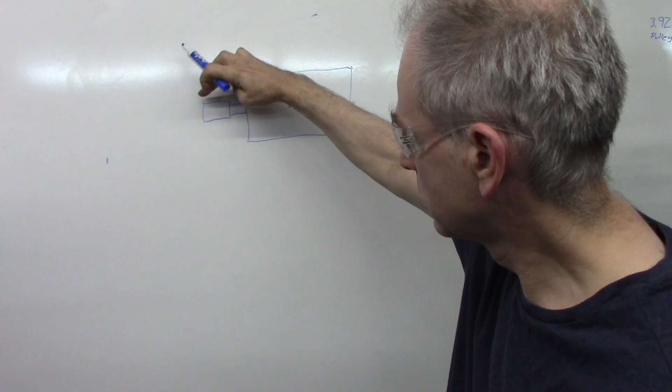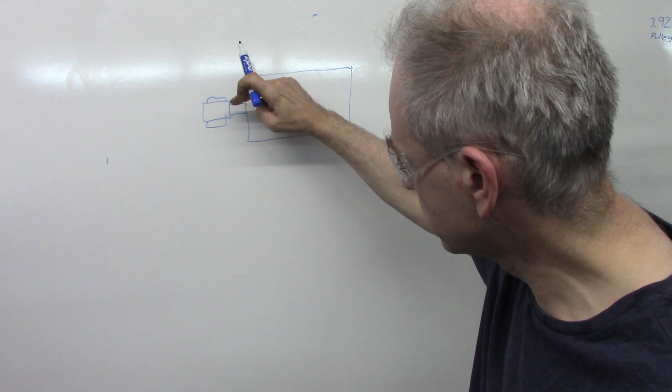Let me draw the motor, okay? Over here we'll show you the shaft, and on the shaft is the pinion gear, okay, and we'll draw some teeth on there. This is very cartoony, my apologies. And that's the gear I'm concerned about, to mesh with another gear, okay?

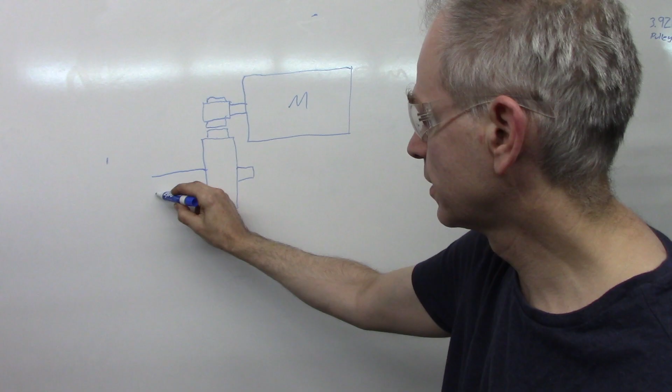And this would be the bull gear inside the transmission, all right? It's a little bit bigger, inside the transmission of the drill press. And there's bearings, and there's another transmission with other gears over here. So this here is the area I was concerned about to set the lash or the mesh, basically.

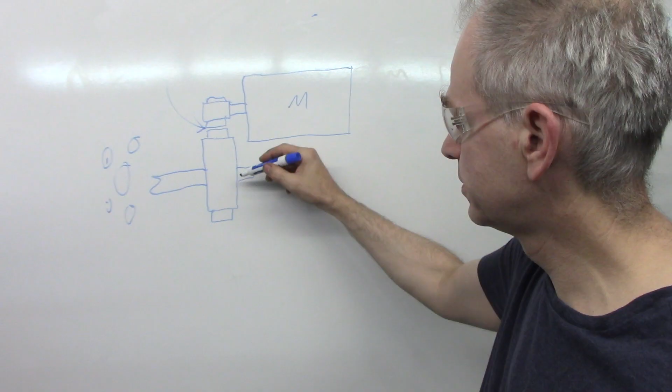How tight this motor shaft is to this shaft. And there's an alignment situation there.

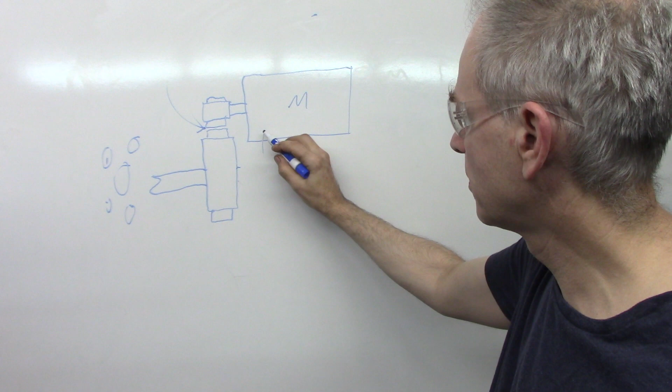So what the motor has is it's got mounting bolts, of course, 4 mounting bolts, mounting screws, and what they're attached to is like these 1 inch or 1 1/8 threaded jack screws, okay? So you can adjust the height of the motor and the pitch and the yaw of the motor to some small extent.

And here is, let's call it, the plate on the drill press where this is attached to, and these are threaded. And there's jam nuts on here and whatever. So these 4 jack bolts, I'm kind of just showing a side view, allow the motor to be going up and down and pitch it a little bit up and a little bit down. Not a lot, but maybe 10-20 thousandths.

So that all controls here how this pinion gear meshes with the bull gear that's inside the transmission of the drill press, headstock, or whatever you want to call it. So not knowing the gear lash, the mesh, and I got manuals I downloaded, there's nothing about it.

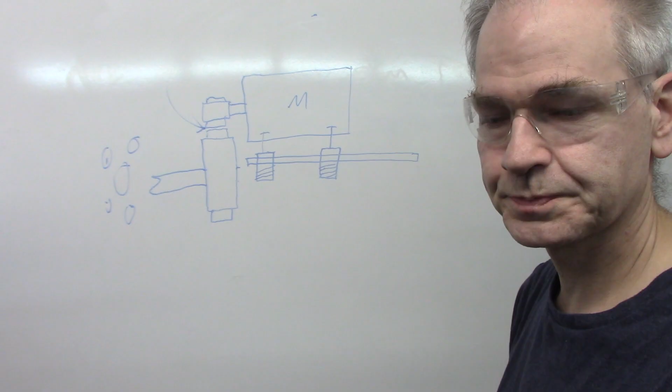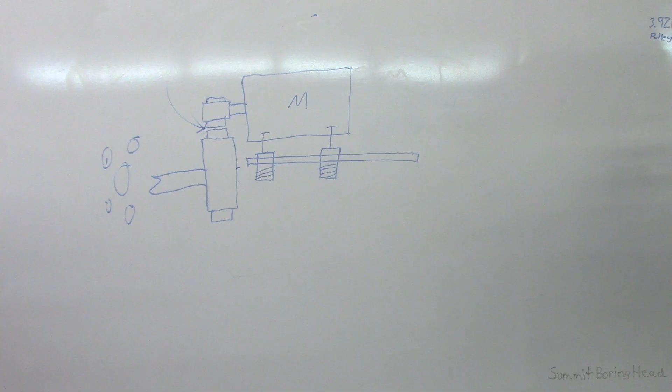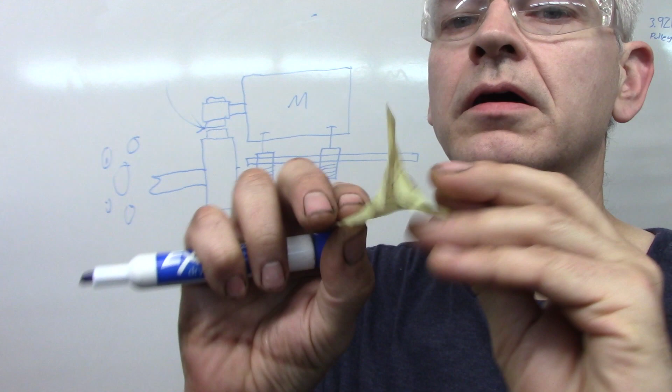So what I did was I used a piece of paper, actually. Let me steal it. Basically, I used a Post-it note folded in half, okay? And this is my contact pattern of the gears. And all I did is, it's just folded in half to give me the thickness. So the paper is 4 thou. Folded in half is 8 thousandths of an inch.

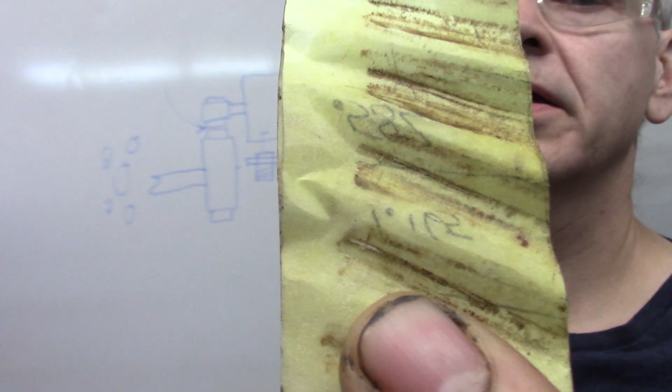And, you know, gave me a pretty good even contact pattern. Oops. Kind of see, there you go. The light hits it right. So that's what I was kind of working with, right inside here.

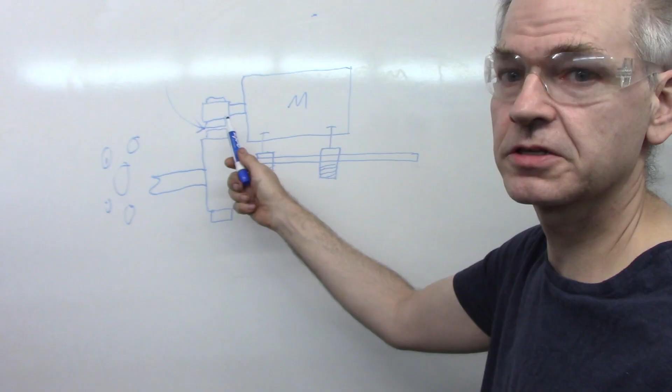So what I did is I put the paper in between the two gears that I was trying to get a mesh distance, but it also had to be parallel, right? It couldn't be wonky. So to get that parallel, what I did is I dropped, I loosened, I slackened off, whatever you want to say, these adjuster jacks, these adjuster screws.

And what I did is, so then the gears are meshing with the paper in between. So pretend my marker is the motor. The shaft of the motor and the gear was solely resting on the gears touching together with the Post-it note paper of 8 thousandths gap.

So then I used the machine level, okay? So let me draw a level over here. So I established that my base plate of the motor and the table of the machine was level, right?

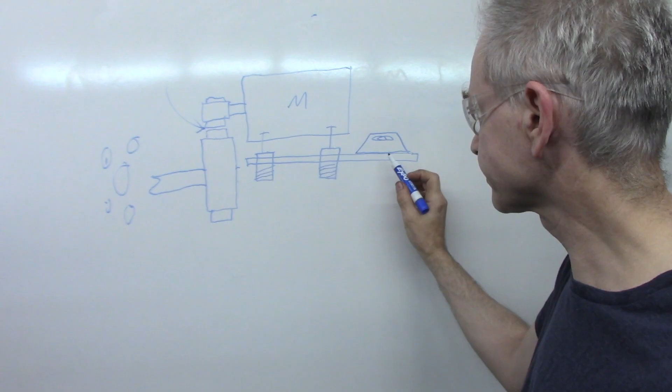With very precision, I use a Starrett 98 level. And this motor, it's a nice motor. It's a totally enclosed fan cooled motor with an extruded aluminum body with cooling fins. So it's got a nice flat top, as opposed to cast.

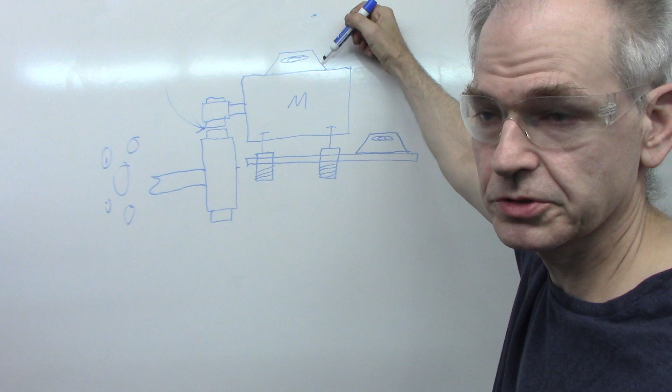It's got a level here, my cartoon levels, and there's the bubble. So I used that level after the machine was leveled, to set the parallel plane of the motor.

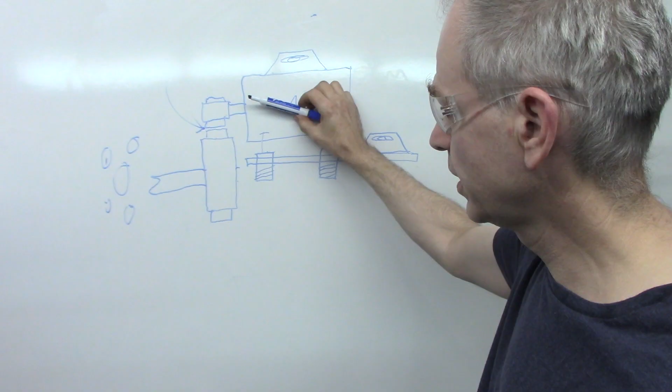So again, I loosened the bolts, loosened the height adjusters, and the motor was just resting right there with the paper in there. I watched the level bubble and jacked up the back one, raising it until the motor was reading level with the level I had on top of it, with the bubble.

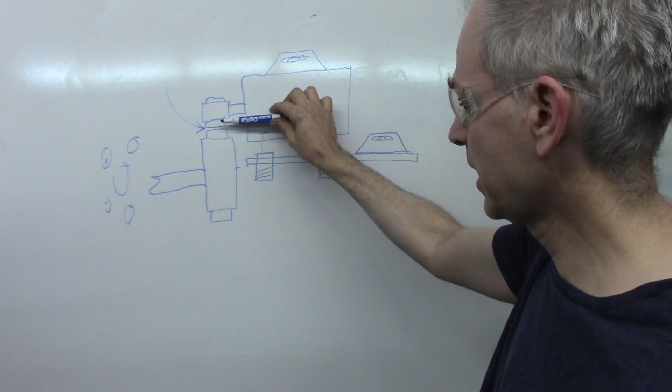And then I knew this gear was parallel with this gear, the teeth were parallel, and I had the gap of 8 thousandths with the paper. And then I just kept an eye on that bubble.

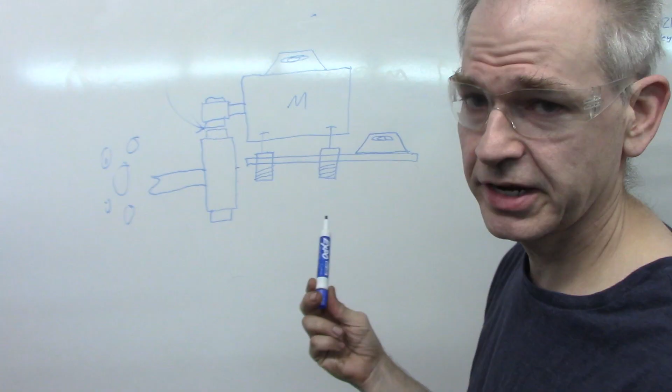I raised up and tightened the front adjuster on the height screw till it just touched. You can see the bubble just started to move, so I knew I was still within range. This Starrett 98 is so sensitive, you just watch that bubble, and if it quivers a little, you can tell the front is just barely touching. I did the front and the back.

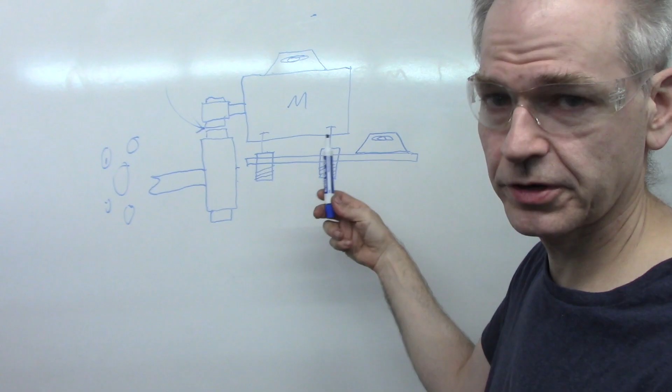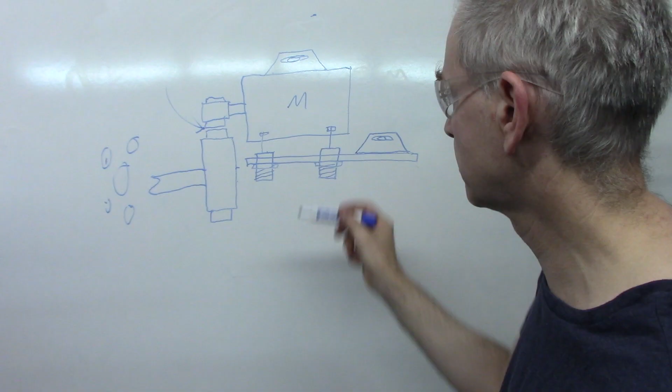Then there's jam nuts on these, like jam nuts on the bottoms. And I lock the jam nuts, so that's set. Then I tighten the bolts that hold the motor down, 3/8 coarse thread bolts to these jack bolts. And that's it, and that worked.

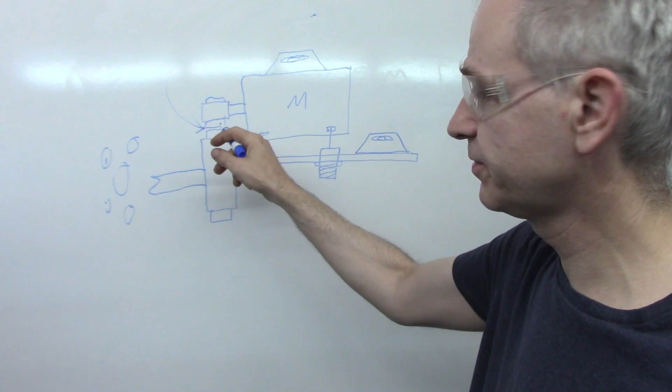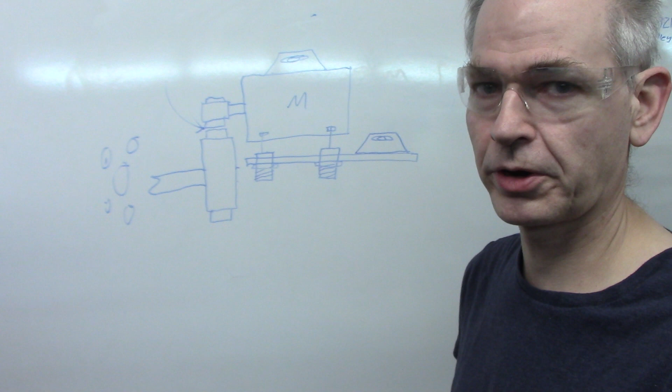So if this isn't right, the mesh is not correct, and the machine, when you turn it on, the gears are loud - it's just terrible. But now it's good.

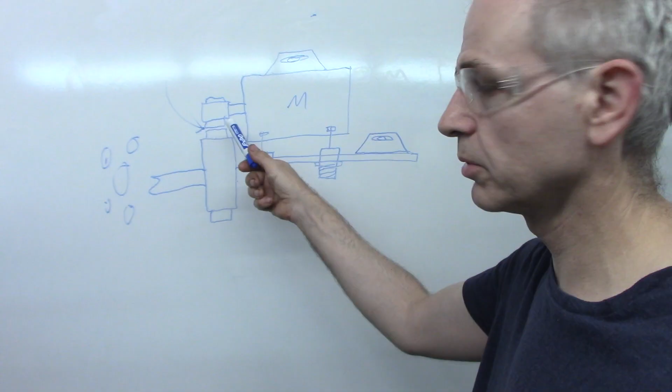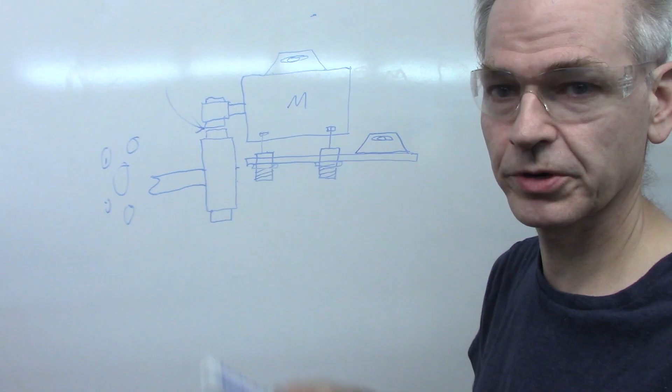So I just wanted to show you how I solved the problem of the gear mesh. This is like a situation a machine repairman or a millwright would be involved in trying to solve. A millwright, if you don't know, is a mechanic that specializes in keeping the mill up, or nowadays you'd call it a factory, keeping the factory running. They call them millwrights because it was typically grain mills, flour mills, textile mills, all that kind of stuff.

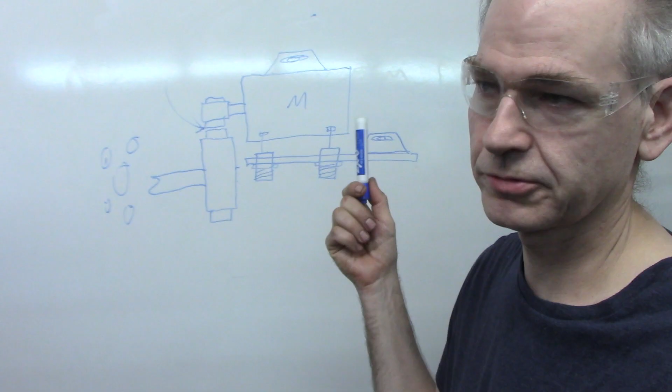So that's it. I tried adjusting it by ear, running the motor slow with the VFD, but that wouldn't work. The proof is in my contact pattern on the actual paper, which looked pretty good. If it was too tight, it would cut the paper on one side or the other, nipping it right in half on the tips of the teeth. So that's how I did it.

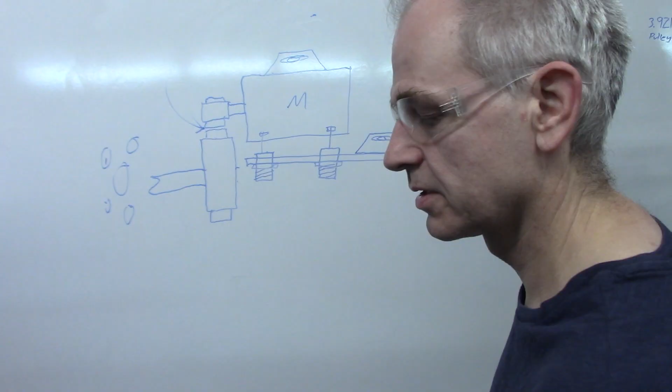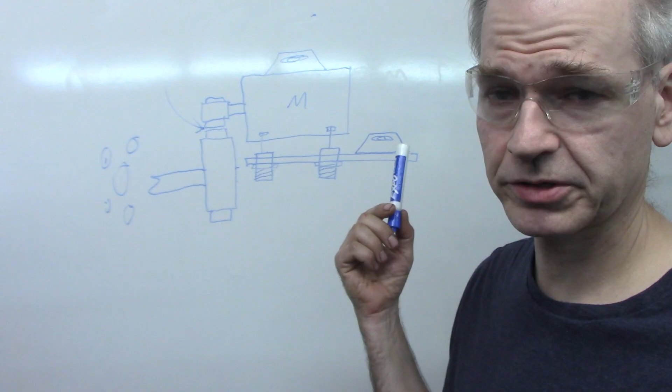I wanted to share that with you guys. A couple machine tools like shapers have gear to gear, sometimes direct drive shapers. Some of the old American Tool Works lathes had direct drive motors, and some of those had phenolic gears or rawhide gears. But that's how I solved it, and I'm quite proud of figuring this out because the drill press was so loud.